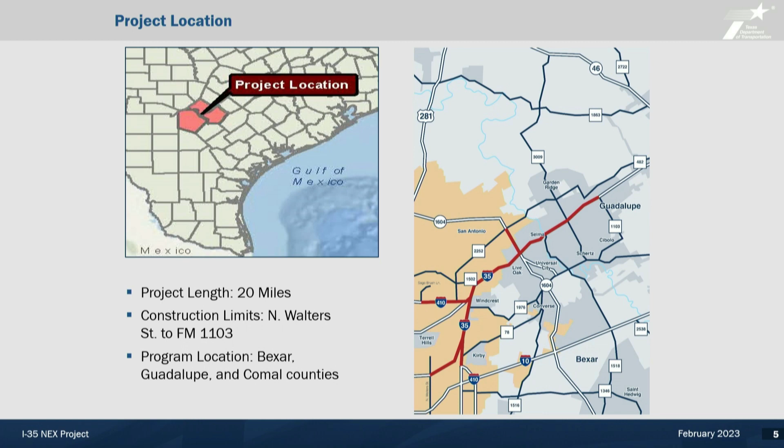Need and purpose of the project. This came directly from the NEPA document that was approved. This project will improve safety and mobility. These two things go hand in hand. Inherently, when congestion is reduced, the safety of the corridor is increased.

Also, this project will address anticipated growth in traffic. As I mentioned earlier, the current traffic is roughly 200,000 vehicles per day, and it's anticipated to double by the year 2044, which is our traffic modeling horizon year.

Also, this project will reduce travel time for drivers. This is closely related to the reduction in congestion, and I'm going to have a slide a little bit later that gives some details on that reduced travel time.

Also, the project will serve regional traffic. This is roughly a 20-mile long stretch of roadway that's going to have very minimal access points, and I've got another slide here in just a little bit that will highlight that. This roadway is intended for longer distance commutes, so basically when you get up on those elevated lanes, you're going to be on them for quite a while.

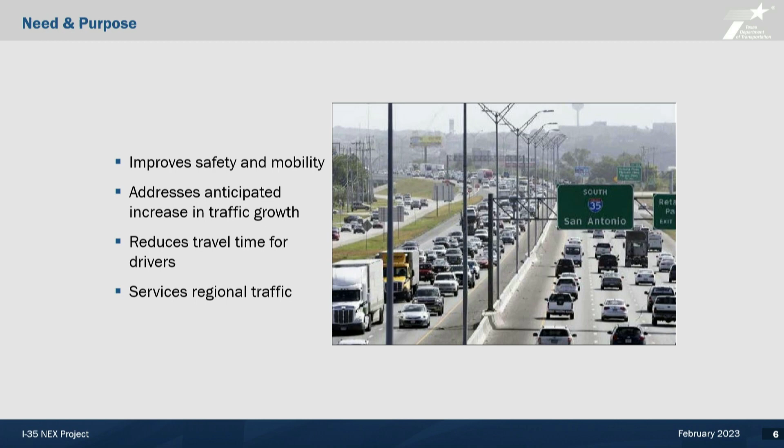If you've ever driven this section of I-35, you know it's a very urbanized, very built out facility. You could imagine if this facility was a 3-lane expansion at grade, what an impact it would have on all the adjacent businesses and property owners along the corridor. So the option to add capacity through the elevated lanes was chosen.

Also, I want to note that the existing infrastructure, the main lanes, frontage roads, ramps, cross streets, will all generally remain as they are today. Basically, the elevated lanes will be added as another level to I-35.

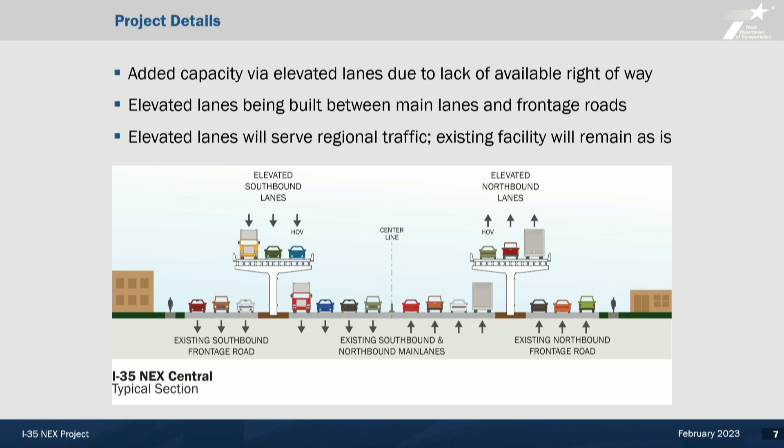This map highlights a number of different things I want to touch on. First off, how this ultimate I-35 NEX project has been divided out into more manageable breakout projects. That's due to some of the complexities of the project, the magnitude, some of the risk factors of the project, and project funding.

So the project has been broken out to what you see on the very north end of the map, which is the North project, or North Bookend project, and that project will be delivered as a traditional design bid build project. A little further south, the Central project was broken out, which Marco will be talking more about in just a minute. Then the South project, which goes from the 410 North interchange all the way down to Walters Street, has been further broken out into the South design build and 2 South design bid build projects.

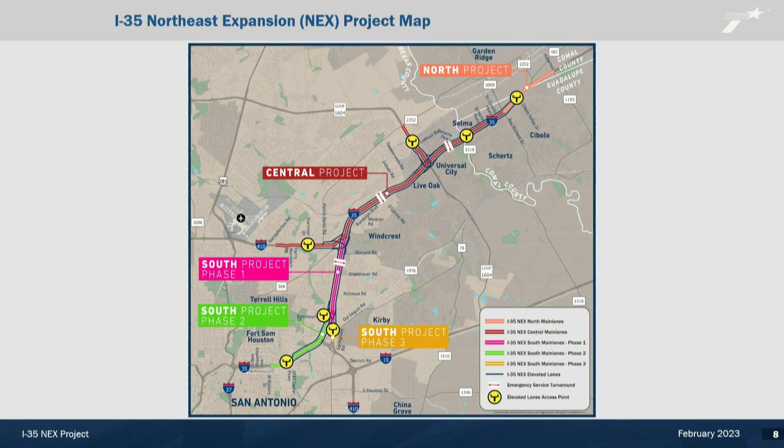Now to talk a little bit about the distribution of traffic. This will speak to the existing and anticipated distribution of traffic along the corridor. I'm only going to talk about the southbound direction; the northbound direction is very similar.

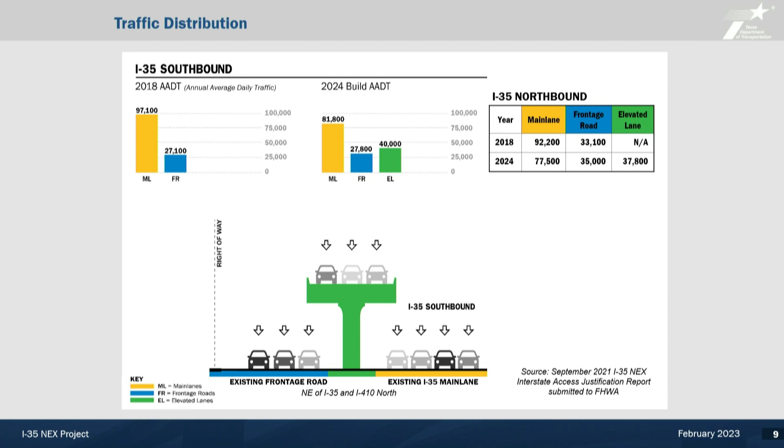Okay, now this is the expected travel time savings, or why are we doing the project. The bar on the left shows the existing main lane travel time from the very north end of the project all the way down to the very south end, roughly a 15.5-mile travel. Currently it would take you 29 minutes, during the peak period, to travel from FM 3009 all the way down to Walters Street.

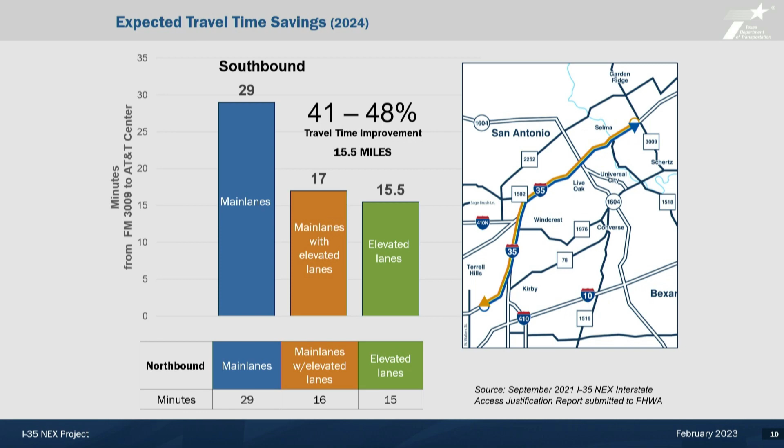Fast forward to when this project is implemented, that same commute on those same existing main lanes, due to the unloading of traffic onto the elevated lanes, would be roughly 17 minutes. And if you were to take the elevated lanes through that stretch of roadway, you'd be looking at roughly a 15.5 minute commute. So you're looking at a travel time improvement anywhere from 41 to 48%.

Now some of the advanced efforts that helped eliminate project uncertainties. First, the schematic and environmental document readiness. The schematic governs the basic configuration of the corridor, providing design criteria, etc., and it has to be completely and thoroughly vetted out for the contractor to be able to submit a bid. The NEPA document can also be a major roadblock if it's not approved. So that schematic environmental document was approved prior to contract execution for this project.

Also, the interstate access justification report and the design exceptions approval certainty. Anytime we change access to an interstate highway, we have to satisfy FHWA requirements for operation and safety along the corridor. Anytime we can't meet design criteria, we have to get design exceptions approved by FHWA. So that IJR and those design exceptions were progressed to where certainty of approval was not a risk to the contractor on this project.

Also, right-of-way acquisition, which is basically the physical land required to construct these improvements. We did have some right-of-way acquisition on the project, and all right-of-way was in possession prior to contract execution.

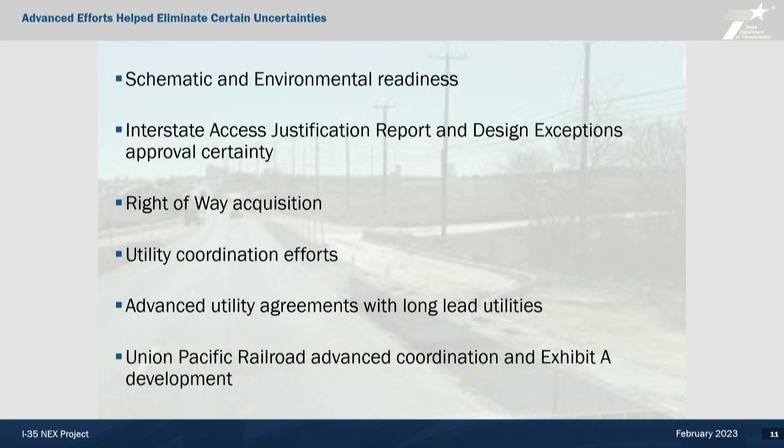In 2013, a preliminary environmental linkage study was done to determine the feasibility of the project. In 2015, that effort was carried to a full schematic and environmental review and was approved as a toll project. In 2019, the project was reevaluated, and as a result of a statewide focus of moving away from tolls, the toll component was removed. In 2021, the Central Design Build project was awarded. In 2022, all phases of the South and North project began. In 2023, we plan to award all South and North projects. From 2023 to 2028, it's basically continuous construction, and we plan to have all projects open to traffic by 2028.

As you can imagine, there's going to be a lot of moving parts between all of these projects going on at the same time, so very close coordination will need to happen between these project teams.

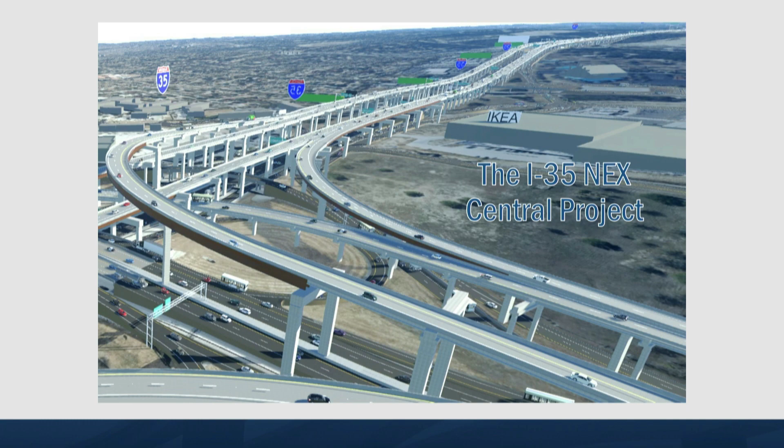So we'll go ahead and take a closer look here. Big button. There we go.

The I-35 NEX Central project, like Daniel mentioned, is currently under construction with the project limits shown on the graphics from Interstate 410 all the way to FM 3009. The design-build contractor is Alamo NEX Construction, also referred to as ANC, a joint venture between Ferrovial Construction US and Webber LLC.

Design started back in 2021, and construction picked up last summer of 2022. We hope to have the project completed in 2027. The project cost is $1.5 billion, with roughly $1 billion for the construction portion of the project.

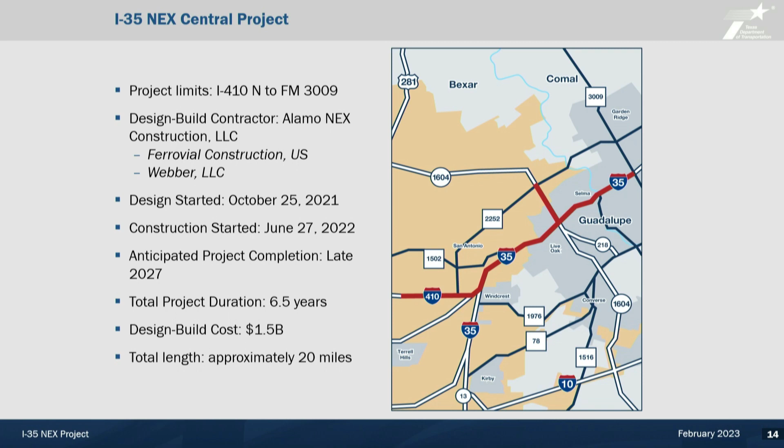Talking a little more about the design-build delivery: traditionally, for our bid-build projects, TxDOT will design the project, put that out for letting, and get a contractor to build it. With design-build, the contractor or developer performs the design and construction simultaneously. This allows for streamlining processes, reducing cost and project schedules, giving the agility to adapt to design obstacles, and allowing input from the construction team and suppliers during design.

It also fosters innovation. So the way I like to explain it is like having a puzzle. In traditional bid-build, you get all the instructions step by step and you put it together. With design-build, they just give you the puzzle and allow your creativity and innovation to put that together. Because I-35 NEX is a large, complex project, we opted for the design-build delivery for this one.

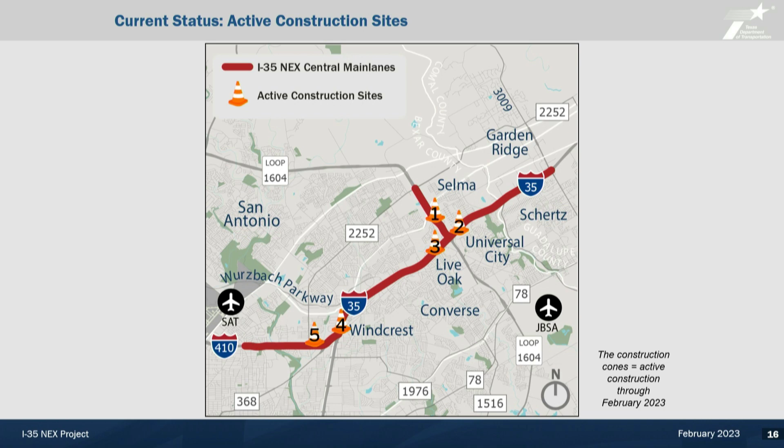In September 2022, we broke ground with the actual drilled shaft bridge foundations. The first one of about 1,500 was drilled in September. They vary in diameters, including 10-foot mono shafts, and vary in depth, with some being as deep as 120 feet. There are other items we contend with, like expansive soils in the area, water tables, and even karst features that may create voids in some of these foundations.

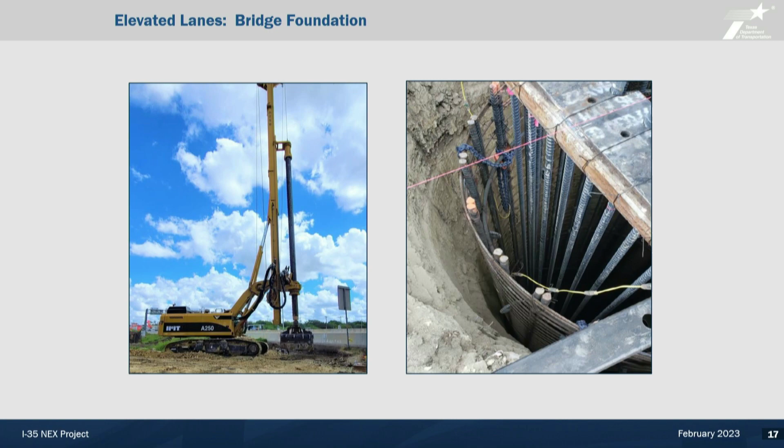On the right, we have our Hill Country aesthetic design. The San Antonio district has an aesthetic detail guide depending on the side of town we're in, so this project covers a mission theme and also a Hill Country theme. That picture on the right is an actual picture, not an Instagram filter, so hopefully you get to enjoy a sunrise or sunset here in Texas.

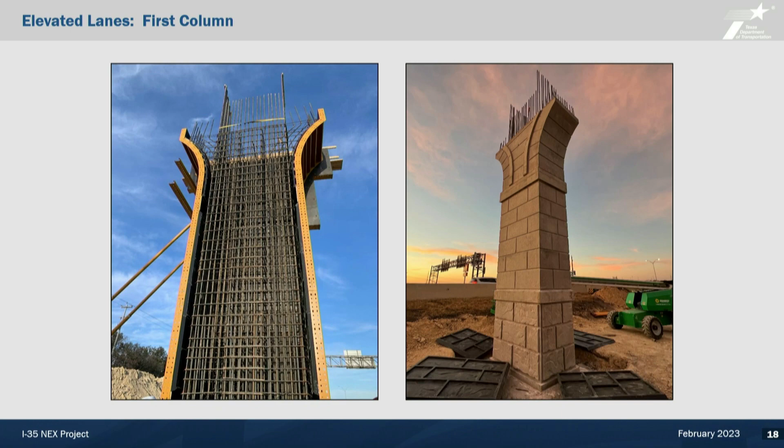People are starting to see the vertical construction, but there's also a lot of other issues the project team has to contend with. Like Daniel said, it's a very busy, urbanized corridor, and one of the items we deal with is aging pavement—small potholes and removal of striping can evolve into bigger issues. We also deal with a lot of debris on the road, crashes, and damage to guardrails and signs.

So keeping up with that is a daily task. Most of the work is behind concrete barriers, so the workers are protected, but there's also a lot of work that takes place with lane closures. In order to reduce impacts to traffic, that work is done at night, and as you might be aware, nighttime work can cause a lot of issues.

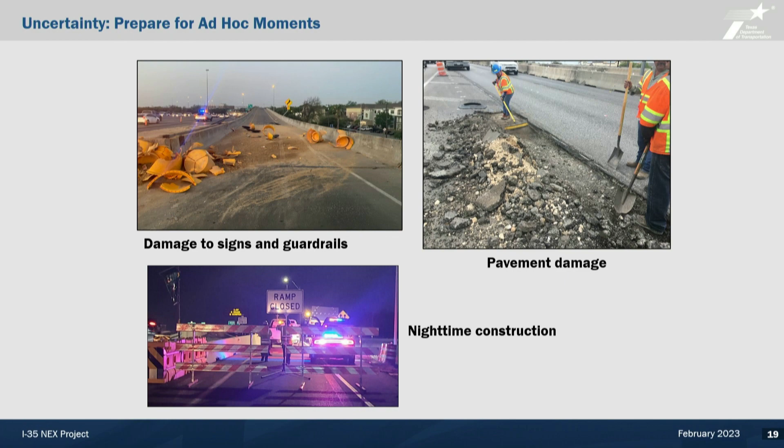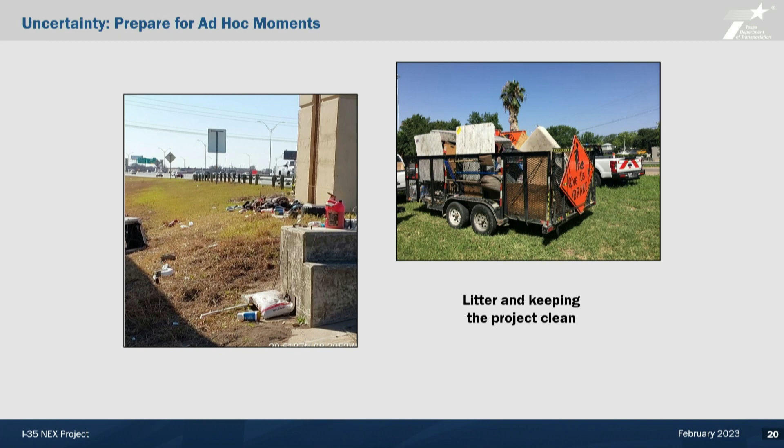Crews have to be on their toes and maintain situational awareness, since people are up to all kinds of extracurricular activities at night, which adds an extra level of concern for us. There's also illegal dumping, a lot of trash and debris we go through trying to keep the roadways clean, and next thing you know a pickup comes by and stuff flies out of the bed. So that's an ongoing process for the project team to keep up with during the day and at night, even with people making themselves at home in our work site. That requires a lot of communication and coordination to prepare all these lane closures and activities.

Our specifications provided a lane rental bank that designates a dollar value to each closure depending on the time of day for the contractor to perform operations, and also the facility, whether it's a frontage road, a ramp, a full closure, or a single or double lane closure. The contractor is responsible for giving us 14 to 21 days advance notice.

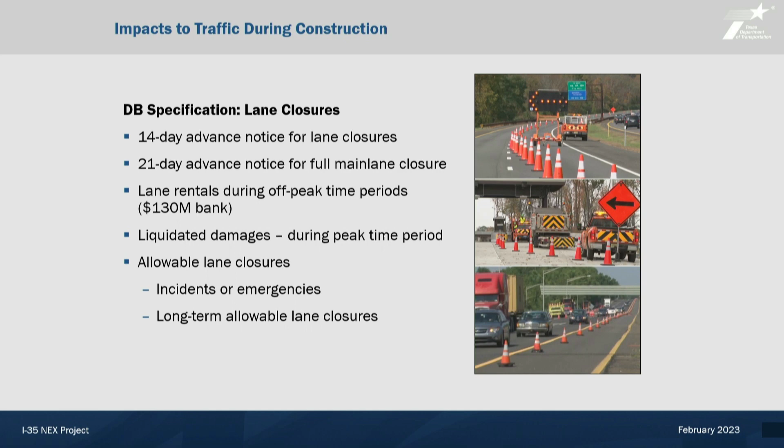On a project of this scale, things may change daily with the weather, like last week's events, so we need some kind of flexibility. Our previous traditional format for setting up these closures was filling out a form, sending out emails, a lot of back and forth, so we had to develop a way to streamline that process. A work zone management app was created to facilitate communication and coordination with the contractor and the public as well. The app has resolved a lot of those outdated processes.

It also creates databases, ways to track the times of these closures and manage the lane rental bank. It also gives you a visual and helps review lane closures for any kind of conflicts that may exist.

Communication is a big part of it, so keeping the community engaged is also a big task. Both ANC and TxDOT and our consultant partners invest a lot of time keeping the community informed and engaged. There are newsletters, e-blasts, emails, text, and a project website that everybody can go to for information, as well as our drivetexas.org app and our TransGuide cameras and DMS systems throughout town. We also provide presentations to neighborhood associations, different communities, church groups, you name it. We reach out to them to make sure we address any issues that come up.

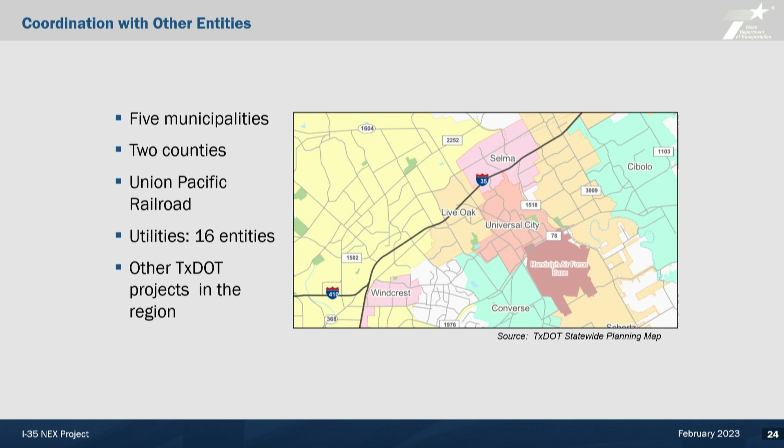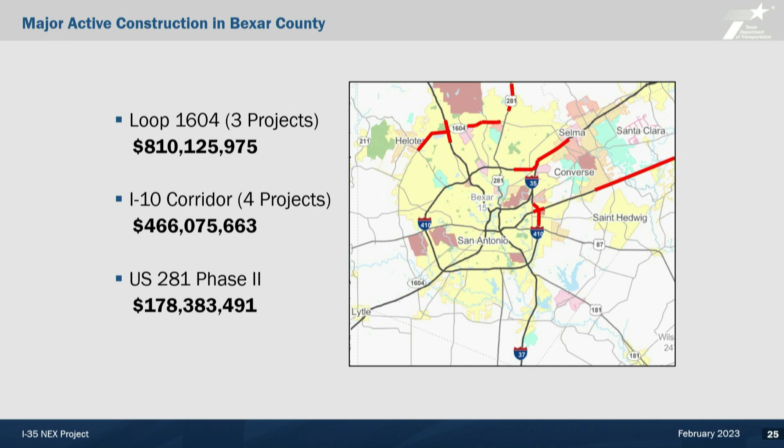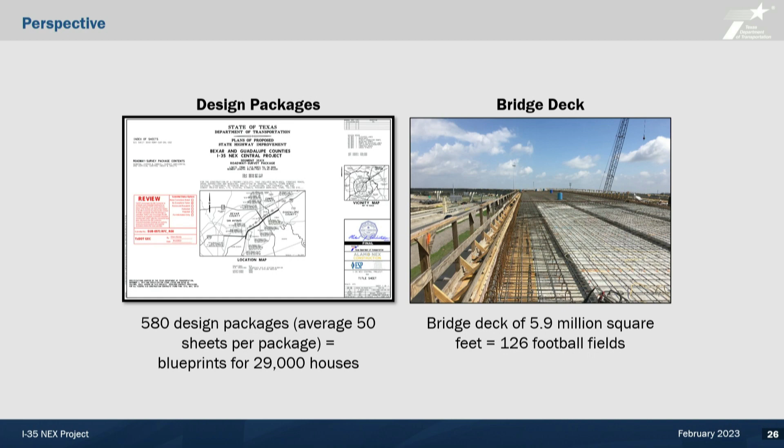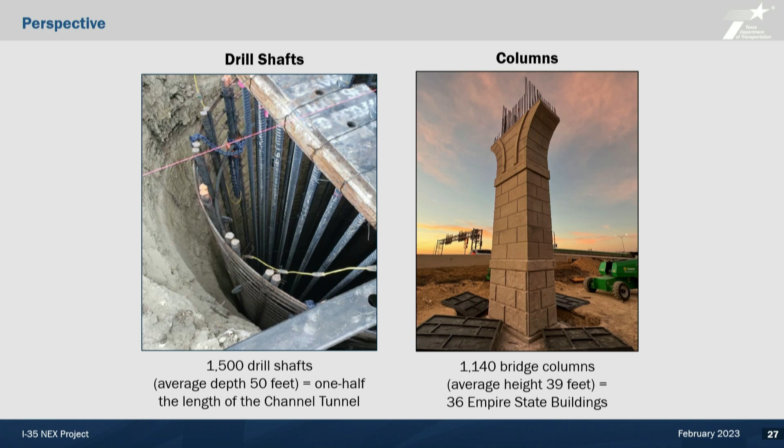Here's some perspective on the project, some fun facts. We're going to have about 580 design packages, averaging about 50 sheets each, enough to build blueprints for about 29,000 houses. About 5.9 million square feet of bridge deck, or 126 football fields. About 1,500 drill shafts with an average depth of about 50 feet, which is half the distance of the English Channel Tunnel, and 1,140 bridge columns, roughly the height of 36 Empire State Buildings.

As far as the beams go, plenty of beams for this bridge project. Concrete, we have about 4,712 beams, which could easily span from here to Corpus Christi if you were to line them up, and about 83 steel bridge beams, roughly about the length of a golf course.

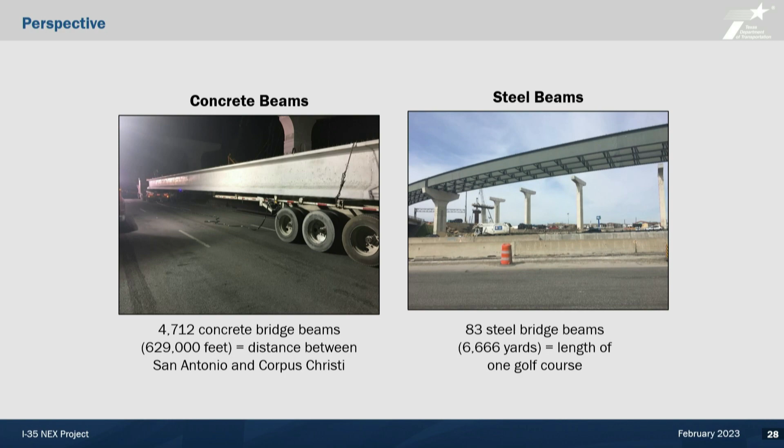Good morning, everyone. My name is Felix Martin, and I'm the project director for Alamo NEX Construction, a joint venture between Ferrovial and Webber. I would like to start by highlighting some of the challenges that we are seeing on the project from the contractor's perspective.

Starting first at a macro level, and not any different than in any other industry, we are suffering the uncertainty and volatility that we are seeing across the world, and that is definitely having an impact on our supply chain. We are experiencing material shortages, shortage of truck drivers, and we are suffering from the increase in oil prices and the increase also in the prices of other commodities.

This increase in commodities is affecting the cost of our construction materials, such as steel, cement, aggregates, and in general any concrete product. And last, as we saw last week, the unemployment rate hit a 53-year low, and that's definitely also impacting our ability to hire not only the workforce for the field, but also to find the talent that we need to fill the office personnel positions.

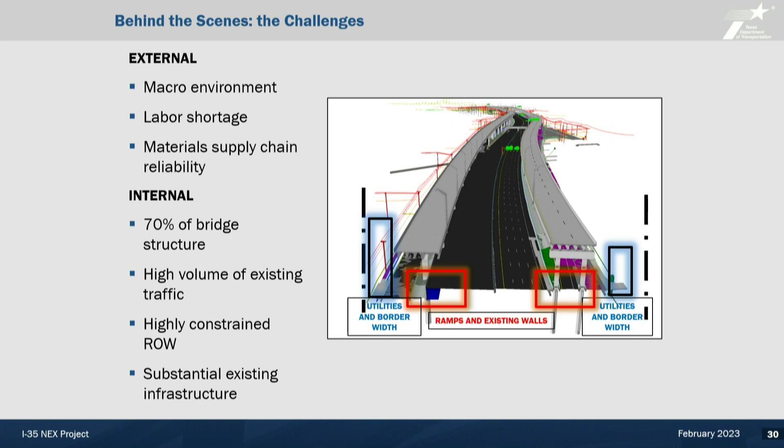So how are we tackling these challenges? I would like to introduce first a concept that I'm sure some of you are very familiar with, which is what we have called project industrialization.

Usually in a heavy civil or a transportation construction project, we are building many different elements under very different conditions, under a changing environment, and also using different construction methodologies.

However, on this project, because of the repetitive nature of it and the fact that we are experiencing a shortage of labor and all the other challenges that I described, we felt that having an industrialized approach, or a mass production approach, was the best solution to tackle some of these challenges.

How did we get this accomplished? It all starts during the design stage by standardizing and simplifying the different technical solutions and construction elements. We think that this will later translate into being able to standardize the operations on the field, making those operations as repetitive as possible, being able to mechanize or even automate them, which hopefully will drive our labor productivity up and therefore lower the demand for on-site resources in the project.

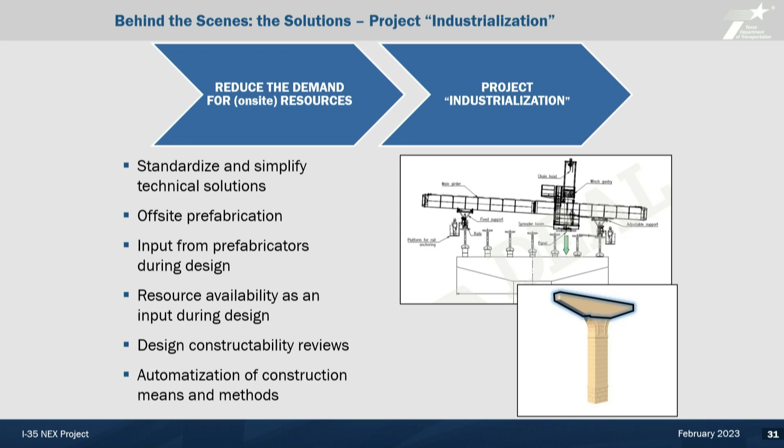Another critical concept for us, to de-risk a project of this scale and complexity, is digitalization or the use of technologies. Construction in general, but especially the transportation construction industry, is lagging behind other industries in terms of labor productivity, performance, and growth. So one of the industry trends today is the use of technologies. That is definitely changing the way we do business. For us at Alamo NEX, it has been a huge driver for productivity growth and to increase the efficiency of our internal processes.

To put things in perspective, we have around 200 people in our office. TxDOT has around 30 people in the office. We are both fully co-located in the same building. We also have above 250 designers working remotely at design consultants' offices across the US. Eventually, at peak time, we'll have over 1,000 field employees. We have new hires almost every single week and many moving parts.

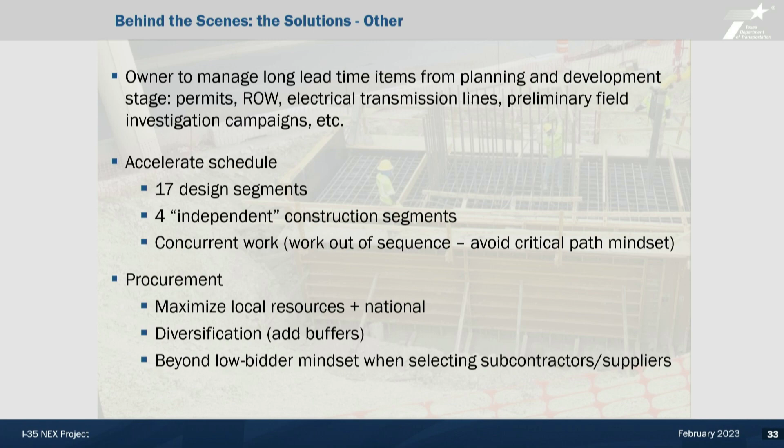All right, thank you, Felix. Thanks, Marco. As we wrap this presentation up, you've heard a wealth of information, probably more than you want to hear on the project, and you've heard some of the major challenges that we currently face and will continue to face throughout the life of this project.

But to this point, I think we've been successful in mitigating a bunch of the issues and challenges, as Felix has discussed. We've been proactive in identifying and collaborating as a team to find the best solutions. So with that, I hope we've been able to successfully articulate this presentation in a way that highlights the project and our perspectives on this extremely important project to the San Antonio District. Thank you.